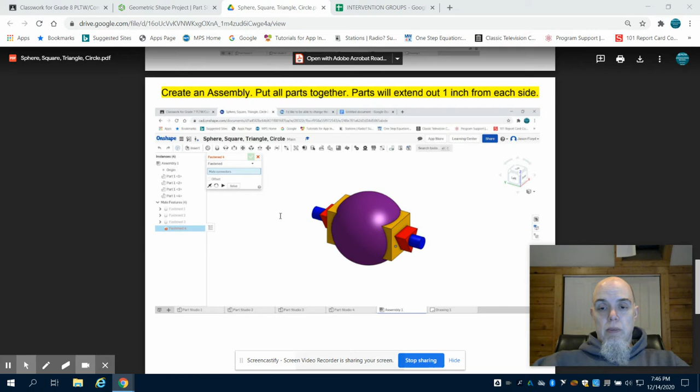The goal is to have each part extend out from each end 1 inch, so it looks like this from the isometric view and this from the front view.

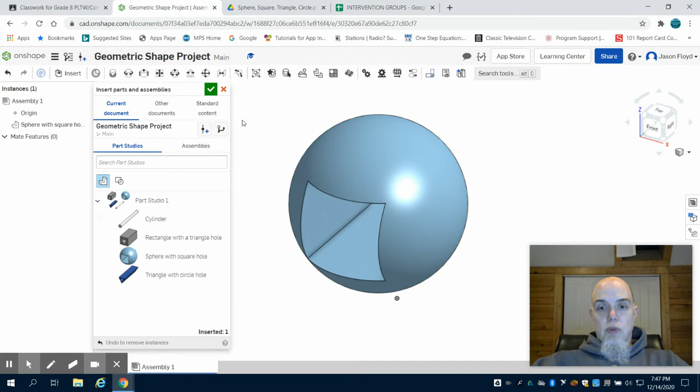So I'm going to come back to Onshape, and I'm going to notice at the bottom I have my assembly file. I'm going to click on my assembly file, clicking on Insert. I'm going to click Sphere with Square Hole, left click to bring that into my field, right click the green check mark. As you can see, if I click on it and drag it, I can move it. What I want to do is right click on it and fix it. Again, what that does, it sets a geometric rule that I'm going to pin this to my workspace so it cannot move. So now I click and drag and I can't move that part.

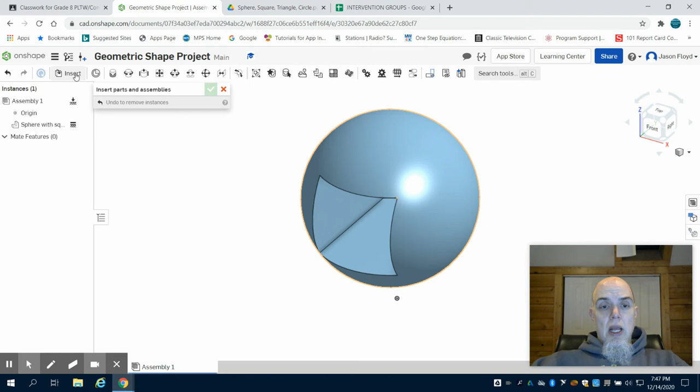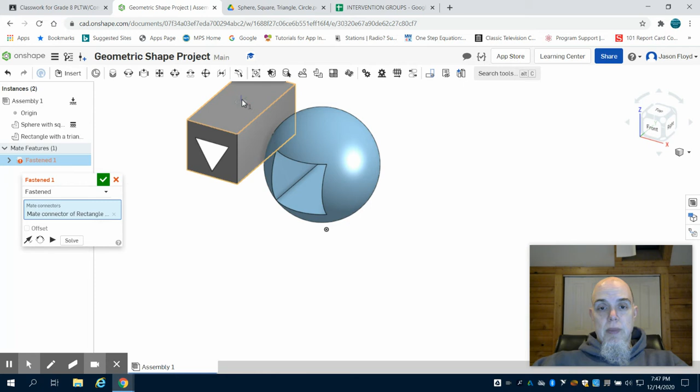I'm going to come back to Insert, and now I'm going to grab my rectangle with a triangular hole. I'm going to place that into my workspace. Green check mark. Now I could easily do this with planar mates, but the easiest way to do this is by doing a fasten mate, because in planar mate I would have to use 3 XYZ to lock it in. This I can just choose the center point of my top, and if I navigate around to find the center point of my square hole opening, green check mark, I'm going to close this out because I don't need a second one.

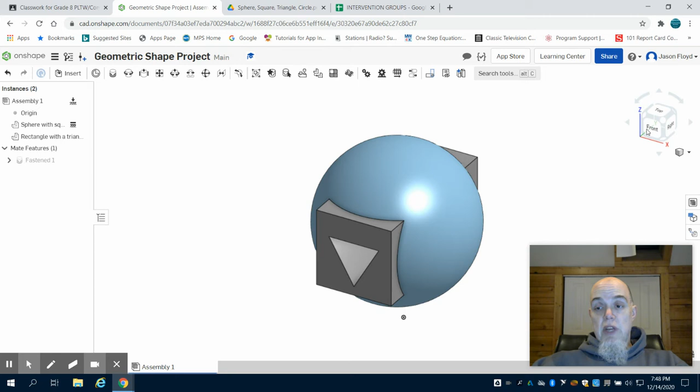And what I can see is I fastened this. Now as I grab onto my rectangle, I've set the geometric rule that it is attached to my sphere at that point, so it cannot move. And because my sphere is fixed, that will not move either.

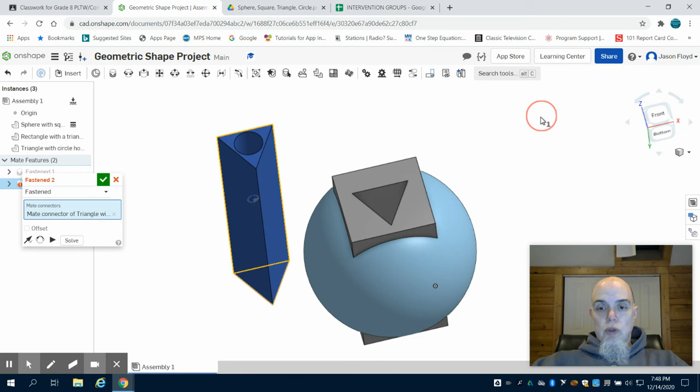I'm going to click Insert. I'm going to grab my triangle with a circle hole. I'm going to place that in as well. Green check mark. I'm going to go through the same process, grabbing my fasten mate, finding the center point in the middle of that equilateral triangle, going to the opening of my triangle, finding that same center point, and clicking and fastening it. So you can see I've chosen those two in my menu here. I can then green check mark to close that out.

Gaining perspective, you can see I'm fastened. If I look at it from the right side, I have those 1 inches sticking out from each side.

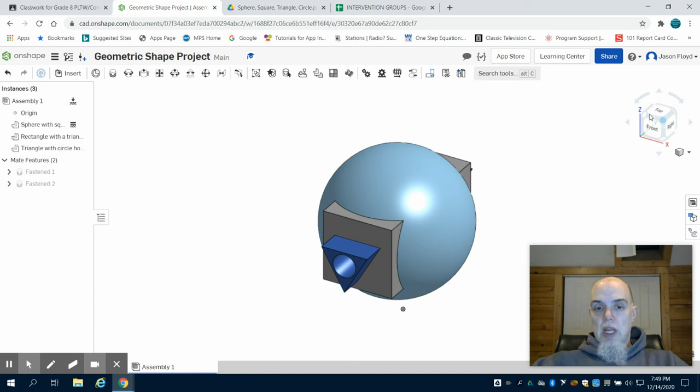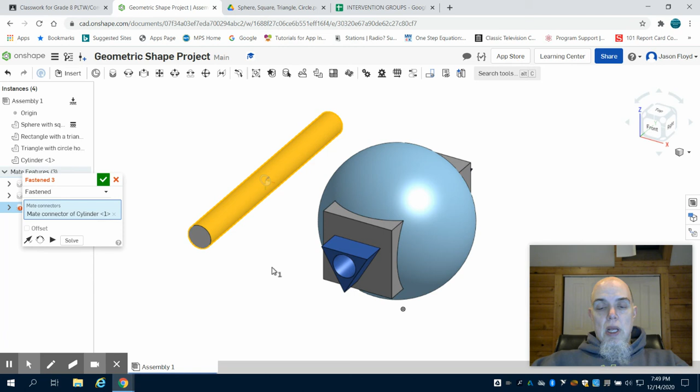I'm going to come back to my Insert button. I'm going to grab my cylinder. I'm going to place my cylinder in. Green check mark to eliminate that menu. Again, I'm going to come to my fasten mate, and I'm going to find the center of that cylinder. I'm going to navigate, and what I want to be able to find now, and this is going to be a little tricky, is find the center of that hole.

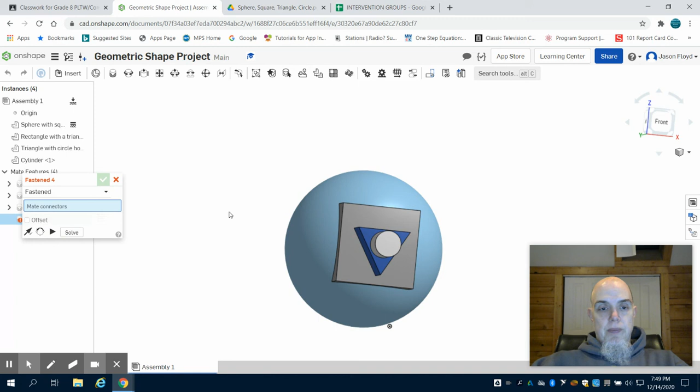You can see that I get the hidden lines of where that feature is when I angle myself properly. I'm going to hit my green check mark. I can close out my fasten menu, navigate myself, and I can click and drag, and I have now set the geometric rules to join this part together, and I can look at it from different perspectives to see that it is completed.